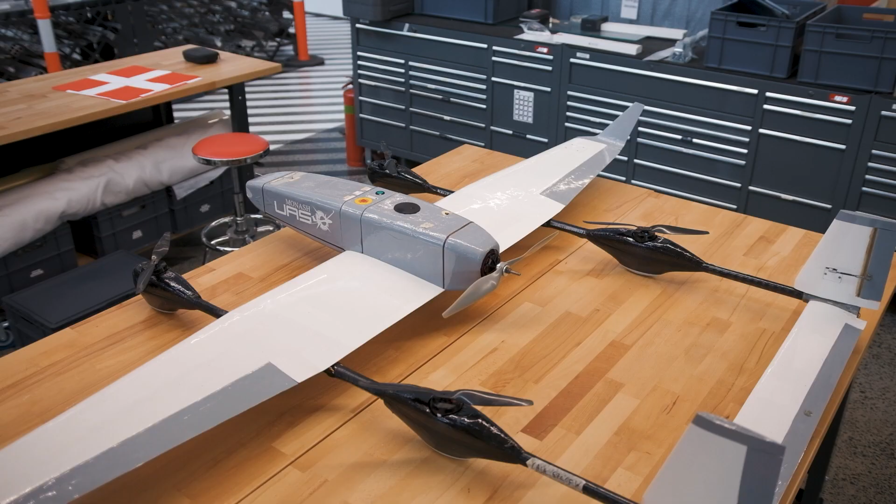This year's Medical Rescue Challenge required us to establish audio and video communication with people in regional areas while they wait for an ambulance to arrive. To combat this challenge, we designed and built two aircraft: one capable of vertical takeoff and landing, which was to deliver a rover, and one conventional aircraft that stays in the air and acts as a relay.

The competition this year was unfortunately cancelled. However, we realised that the relay aircraft we designed might be capable of breaking a current world record. Our aircraft was designed to maximise endurance, to maximise the time that the aircraft can stay in the air and transmit the feed to emergency services. In doing so, we designed an aircraft capable of flying longer than the current endurance record for under 5 kilo aircraft. The current record stands at 2 hours and 20 minutes, as set in November 2020.

To maximise our flight time, our team undertook a few projects to reduce weight and drag on the aircraft, undertook thrust testing to select the most efficient motor and battery combination, and ensured that we minimise electromagnetic interference. At this stage, we constructed a test bed that allows for pilot training and autopilot optimization.

Our next steps over an 8-week period, when we are allowed back on campus, will be to construct a model on which we can easily test and replace different motors, and a final version that will break the world record.

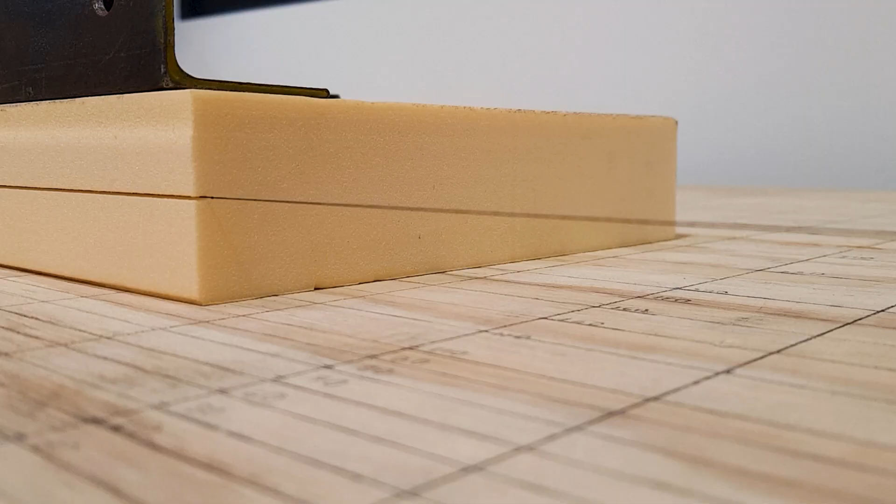So how did we make all this possible? We've been working on reducing the weight and drag of Local Hawk's wing. Our current wings are made by laying up fiberglass over a foam core cut in the shape of the wing we want to build. These wings are something like 7 to 10 times stronger than they need to be. In aerospace design, we want things to be as light as possible, which means we want them to be as weak as possible with some factor of safety applied.

I know that sounds bad, but any extra weight that goes towards increasing strength beyond what we need costs more energy to make it fly. The way we make our wings also creates a seam at the leading edge, which has to be sanded perfectly smooth, otherwise the aerodynamics over the rest of the wing are ruined from the start.

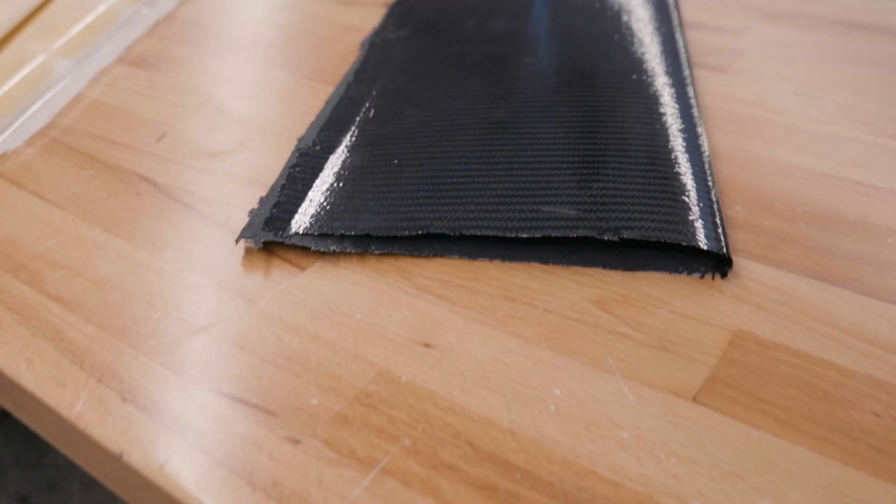We have devised a layup method that allows us to make the skin of the wing without the seam at the front and separate from the foam. This improved leading edge will have reduced drag, which means that the energy that was required to overcome this drag can now be used for longer flight times.

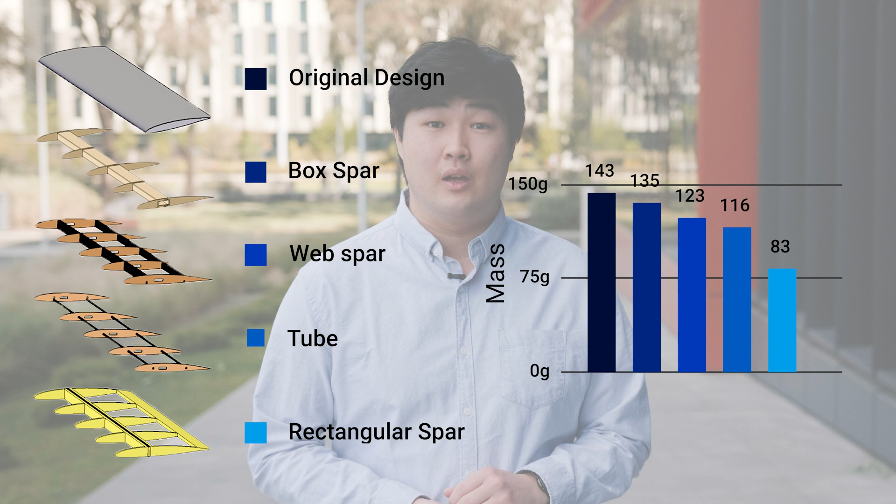Now that we can make the skin separately, we have a lot more flexibility about the internal structure design. Whilst extruded polystyrene is incredibly light, air is much lighter, so we have designed an internal structure that is mostly hollow. This new construction method would only be adopted if it brought more benefits than drawbacks. The main benefits of this new design are drag reduction, as mentioned before, and the potential for weight savings, with all 4 designs for internal structures showing a weight reduction. The rectangular spar design in particular has a weight saving of over 40%.

The design I have here has a weight saving of 20%, made of hollow tubes from carbon fibre as well as plywood spars.

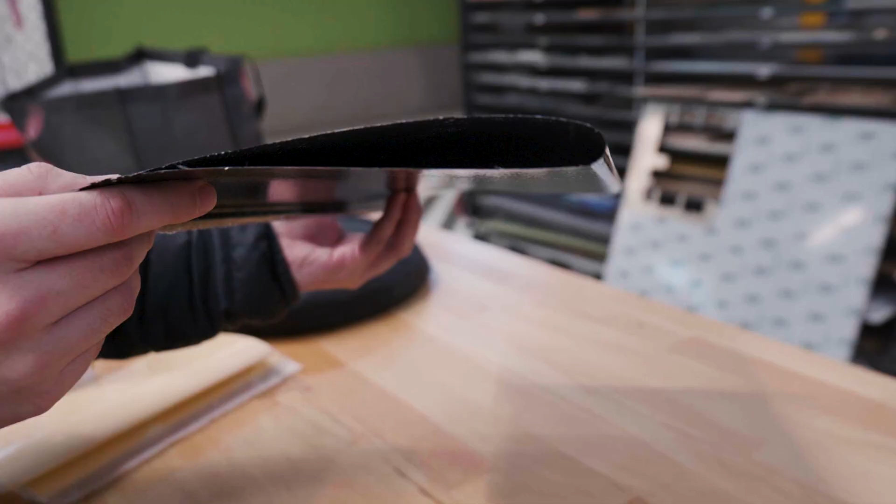During our test constructions, we found that the new method of construction is much simpler, since we only need to create the skin, then attach the internal structure at a later time.

In future we are looking to verify the strength of our designs experimentally. However, this has been delayed due to the lockdown.

With the new design, it also requires a redesign of our control surfaces, as well as the mounting surfaces for our servos. This is being done concurrently by another team. UAS's current control surface design features an exposed linkage and hinge slot.

Servos are connected to control surfaces by a linkage, generally a simple metal rod, running from the servo arm to a horn attached to the control surface.

Analysis on ANSYS CFD found that the straight test section of the wing created 15% extra drag at 0 degrees angle of attack. We aim to take that down to 0.

Our new internal control system fits inside the wing so that there's no interruption to the smooth surface of the wing. This is done by placing the servo deeper inside the wing, shortening the servo arm, and 3D printing the control surfaces separately from the original foam core of the wing.

The new 3D printed control surfaces are extended on the underside so that when the control surface moves up or down, the airflow remains attached, reducing the aircraft's drag.

The control surfaces can be printed out of carbon fiber filament or even a fiber reinforced nylon, which weigh little more than the existing skin and foam control surfaces.

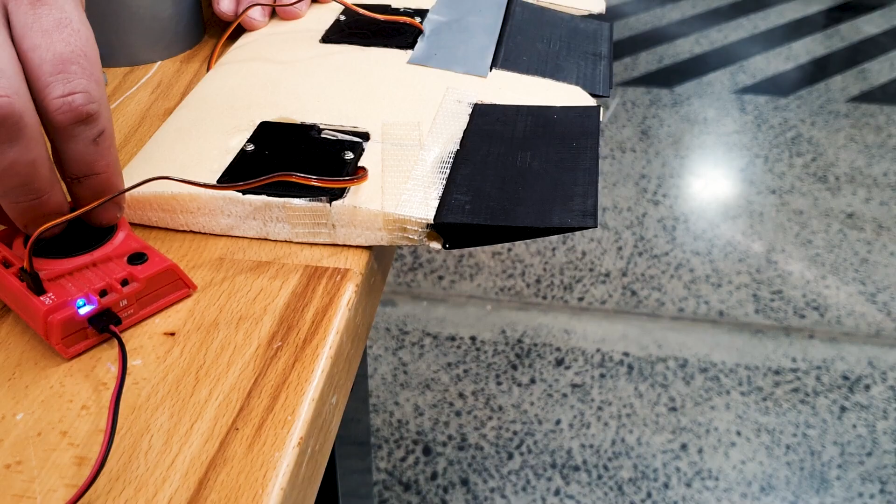The first prototype involved retrofitting an internal linkage mechanism to our current chord wing design and hinging 3D printed control surfaces. Notice how the mechanism is completely enclosed inside the wing, and the hinge slot remains covered for most control surface deflection angles.

We encountered issues around component access and ease of installation due to the small size of the parts involved, although the design does still fulfill the drag reduction requirements.

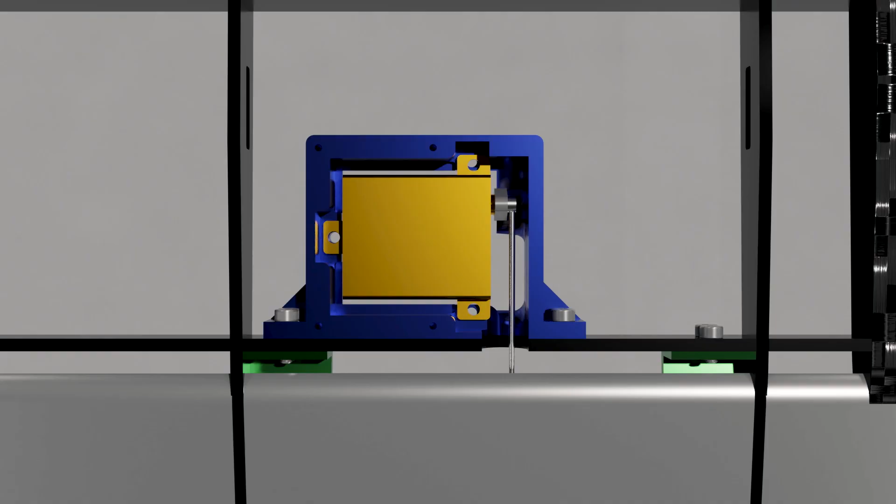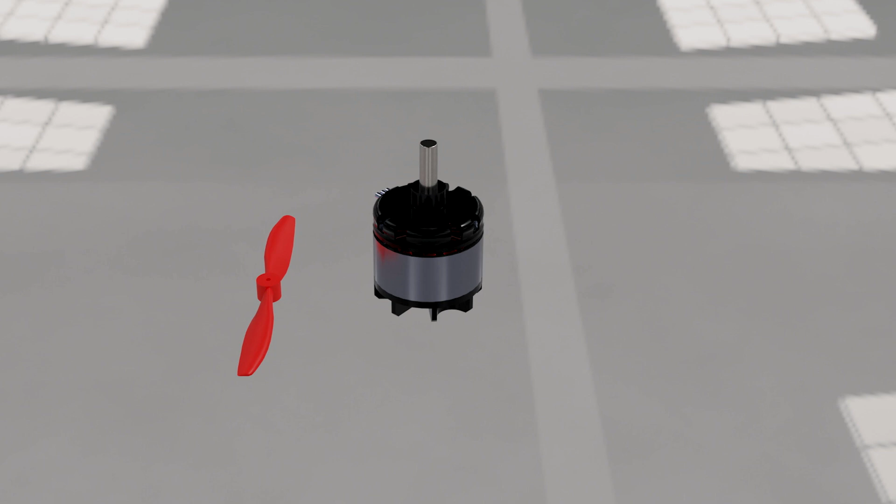Now we have a great airframe and construction method. What about the powertrain? The powertrain of an aeroplane generally consists of the propeller, the motor, the speed controller or ESC, and finally the battery.

Beginning with the motor and propeller, we had to find the ideal combination where the propeller was producing its thrust as efficiently as possible, and the motor then producing its power as efficiently as possible.

There are two variables to optimize here, being prop diameter and prop pitch. These are related together by the ratio pitch over diameter. We can optimize the best P over D and then choose the diameter to have the highest prop efficiency.

Now that we've chosen the propeller, we need a motor. There are literally thousands of motors to choose from, sourced from all over the world, so it's not a small feat. Furthermore, motor manufacturers all provide different specifications, such that motors are hardly comparable.

It's impossible to decide on a motor without a little guesswork, at least not without testing them ourselves. So we decided to test them ourselves.

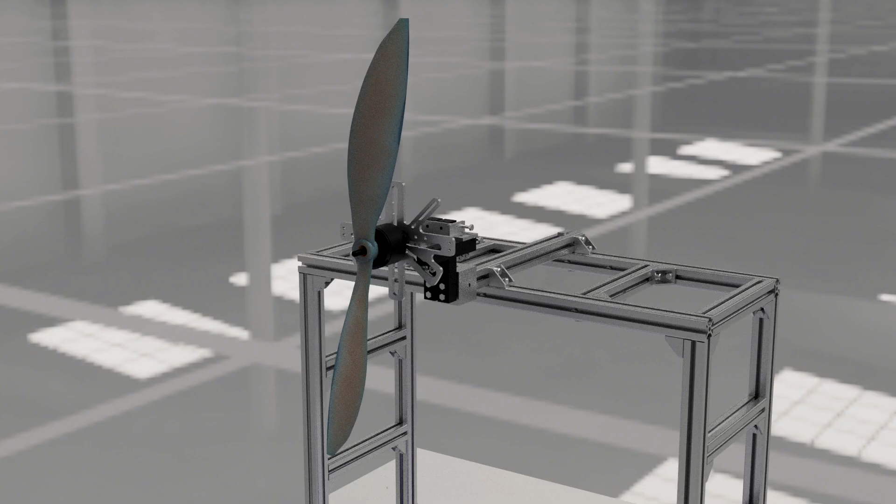The thrust test stand tests, monitors and records the effectiveness and efficiency of our UAV propulsion system. This stand records thrust, torque, RPM and electrical power at 2 stages of the cycle. It also has multiple sensors.

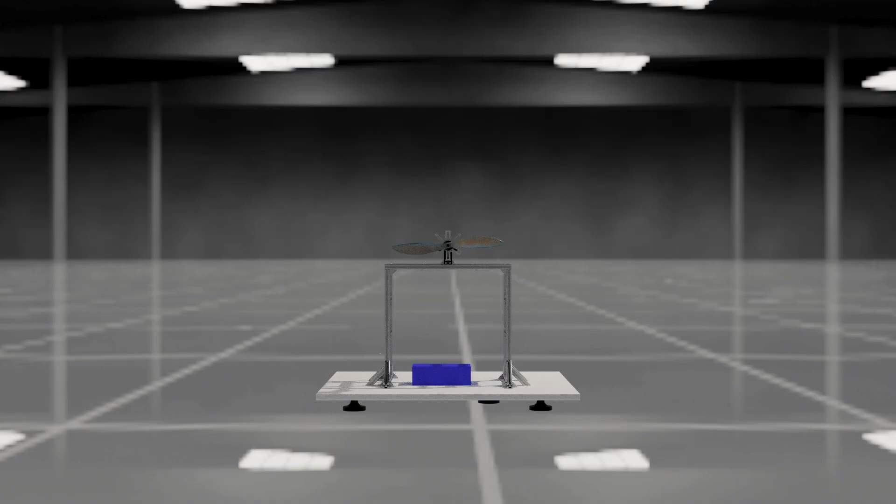All these sensors are integrated through a custom-built PCB that interfaces with Tora. With this data, the powertrain can be optimized for a given aircraft requirement. For example, the world record aircraft requires that we fly at the maximum lift-on drag.

We now have a reliable platform to accurately predict how our aircraft will perform and make the best decision possible about our UAV propulsion system.

With motors and props sorted, we can now turn our attention to the electronic speed controller. Traditionally, these work by turning on and off power to the motor really fast to adjust the power going in, kind of like a square wave. The inductance of the motor normally smooths this out and it's fine.

For this plane, however, we needed something better. We used something called field-oriented control, which basically provides a pure sine wave to our motors. Using this, we can increase efficiency by up to 10%, which is huge.

The last step of this process is to find a battery. In keeping with the theme of innovation with this project, we looked at custom lithium battery packs.

These have astonishingly high energy densities and are great for our use case of a relatively low power draw system. We were just about to pull the trigger on those batteries when our attention was drawn to a new cell type called semi-solid lithium technology.

These have the same energy density as lithium ion, but allow much higher current draws, allowing us to create hybrid battery packs suitable for even our most powerful aircraft, such as our airframe. With such high power draws from our mainframe though, it brings some unexpected issues.

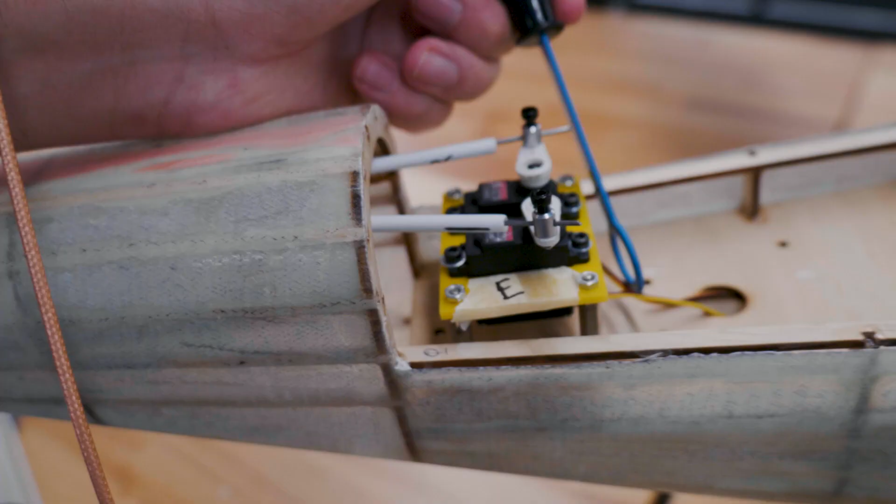Until now. We found uses for our EMI probes in no-contact PCB debugging. By using a really small tip, we can pinpoint exactly what circuit component is generating noise and couple into the circuit to see what's going on.

Using these probes, we revised our avionics stack to optimally shield from EMI. We completely rerouted all wiring for the Local Hawk, and we finely tuned our antennas to reduce power draw. That last point is especially important for the world record, where we need to reduce power draw as much as possible across our avionics stack.

Redesigning the wiring harnesses allows us to eliminate nearly all servo jitter that can waste valuable energy. With all this technology and development, this Local Hawk is our most advanced yet, and we can't wait to smash the world record.

Our project Girbal is named after the Bundjalung word for surrounding attack. We aim to create a swarm of autonomous drones that can locate and navigate themselves indoors, are safe to fly around humans, and can get to their goal destination without colliding with other drones. So how do we do it?

Our indoor positioning system utilises new technology, the same used in Apple AirTags, so that our drones can identify their precise location everywhere. We've also implemented our own collaborative pathfinding algorithm, so that drones will never crash into obstacles or each other. Our pathfinding algorithm uses positioning technology to allow our autonomous drones to find the most direct path towards their goal without any collisions.

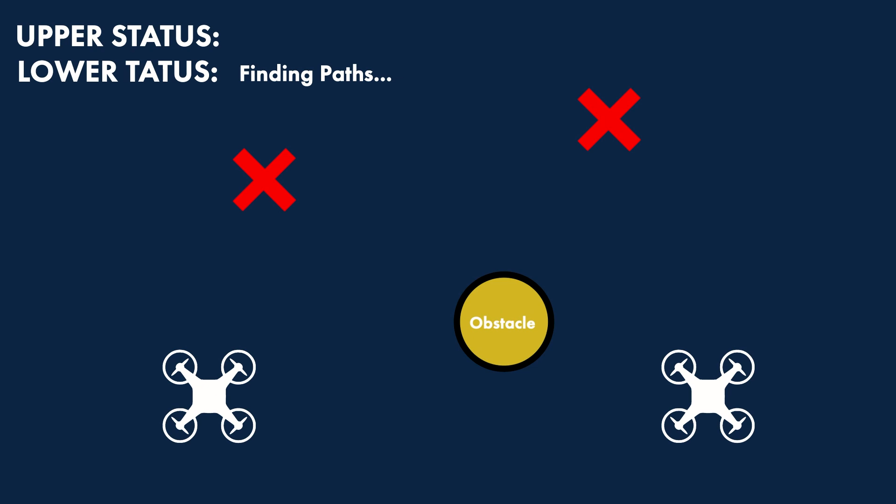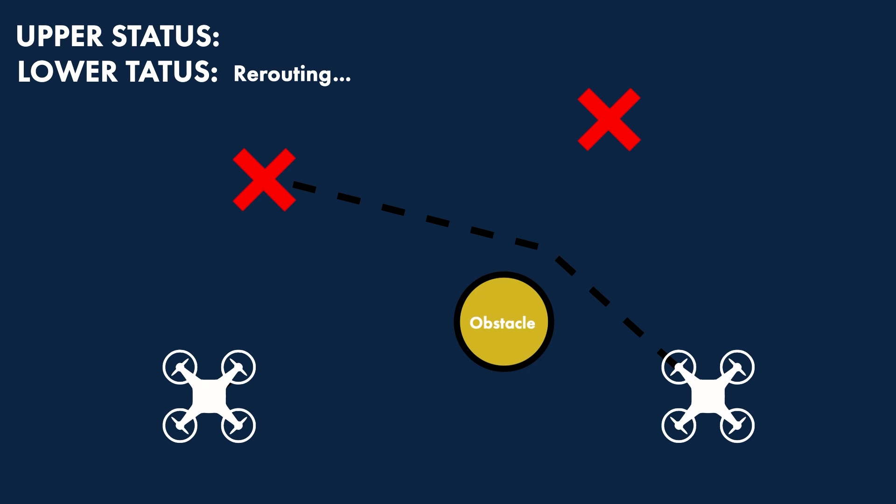To achieve this, it comprises 2 layers. On the lower layer, the algorithm searches for the most direct path for each drone individually, avoiding known obstacles on the map. As part of the upper layer, the algorithm searches for conflicts between the drones' paths. If a conflict is detected, the algorithm requests that certain drones replan their path before checking again to ensure no new collisions have been created.

Once it is sure that there will be no collisions between our drones, the paths are sent out to corresponding drones over our network. We have developed our own graphic interface for testing, enabling us to better understand how our algorithm is running and if there can be any improvements made. This allows us to keep working on our algorithm, continuously trying to improve its efficiency and efficacy.

GPS is an amazing tool to find the position of our drones in 3D space. It's a shame it doesn't work indoors. On the other hand, ultra-wideband technology is an increasingly popular choice in industry for indoor positioning and high-precision locating. We are using it to replace GPS indoors. UWB can be accurate to within 4 centimeters by measuring the distances between the drone and multiple stationary points.

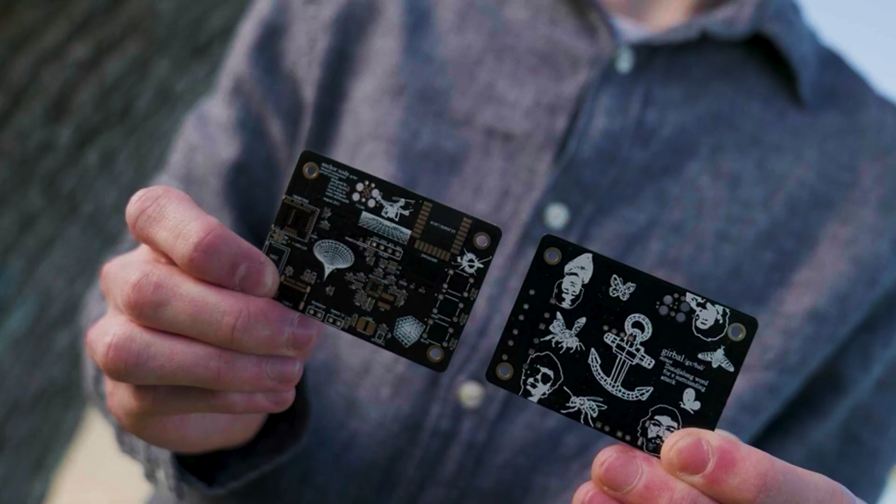So how do we make these stationary reference points? Well, we call these things anchor nodes, and communication between the drone and the mission controller takes place via these anchor nodes over a network type called thread. The benefit of implementing a network using thread is its ability to repair itself and dynamically respond to changes in the network, ensuring a high level of robustness and reliability.

The PCB for these nodes combines various components, including a module for UWB communication, a module for thread network communication, and a battery management system. Together, these components allow us to form a portable mesh network that has multiple anchor nodes communicating to each other, to multiple drones, and to a central mission controller that facilitates positioning, telemetry, and goal setting for navigation.

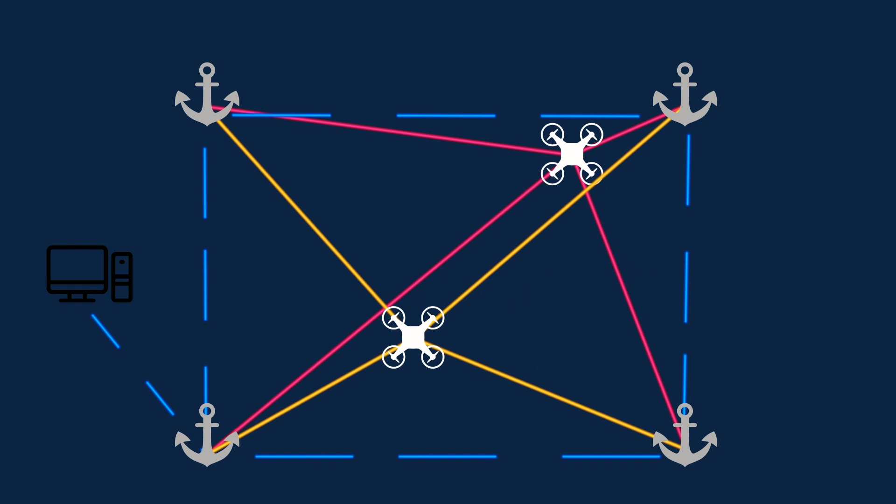So we can pick up an anchor node, place it around a drone, and it will automatically detect its position, join the network, and start helping out. The entire setup can be done in under 5 minutes without any configuration needed.

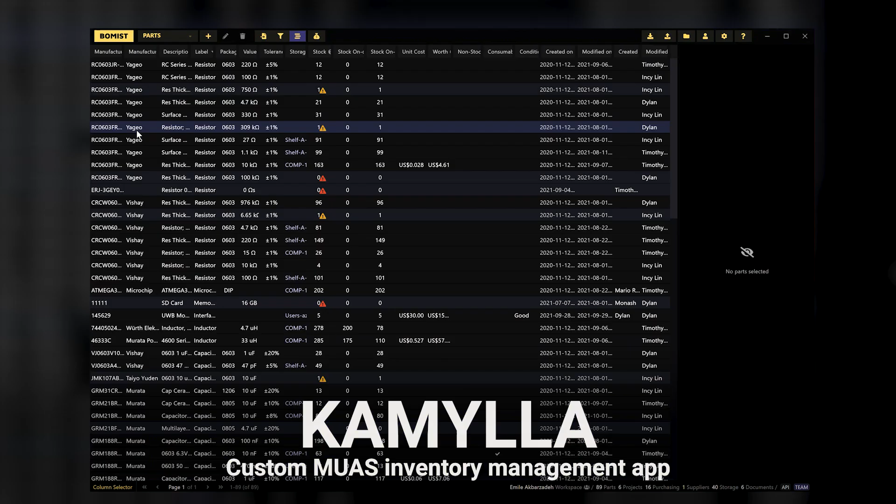Kamylla interfaces seamlessly with BOMIST and the inventory management program. Together, we aim to prevent items from being lost and flag items that need to be reordered to avoid delays in our projects. Kamylla is easy to use and a clean web app that works alongside BOMIST.

Using their own account, a UAS member can scan an item to take it out of inventory. Then later, you can simply scan the same part to return it, all from Kamylla. This allows us to conveniently take and return items from the compactors, JBS cabinets, or the workshop inventory, all without touching another computer. A common problem is needing to search stacks of drawers to laboriously find potentially 100 different PCB components.

With our new inventory management system backed by Kamylla, this is a problem of the past. BOMIST empowers UAS members to create a custom project, import their PCBs, bill of materials straight from Altium, then generate a custom purchase list of any components not stocked at UAS. This helps our projects deliver on time and on budget.

UAS members can select from a range of quotes automatically sourced by BOMIST. We can also manage our supply chain to create custom quotes and assign this to custom suppliers we've added. After ordering, this enables us to track a purchase from order to delivery, keeping everyone informed at all times. Once added to inventory, a UAS member can scan these items, scan a breadboard, and be on their way to work on one of these projects.

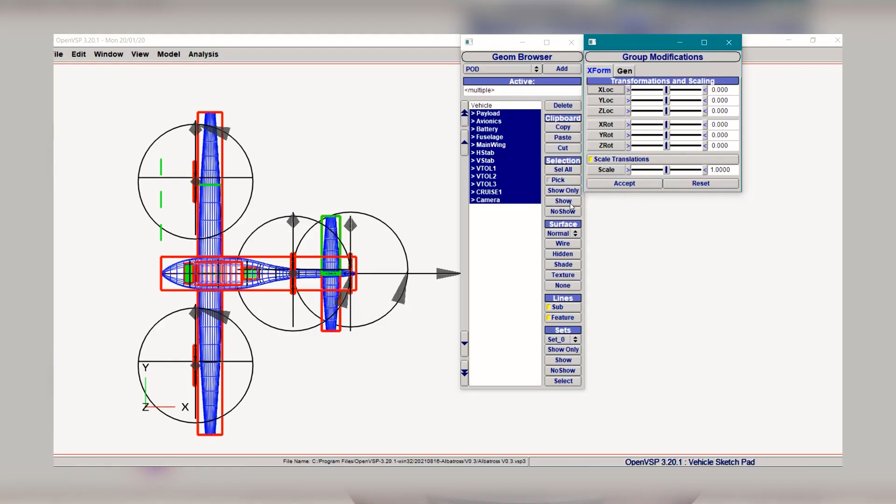Once we have the best of those designs, we can continue to iterate on it to increase its performance. We often use Open Vehicle Sketchpad, a tool originally developed by NASA, at all stages of our design, since we can quickly define and modify an aircraft as well as get estimates for drag and lift.

We also use XFLR5 for analysis. However, because it does not include the aircraft's body and drag calculations, we mainly use it for analysis of the aircraft's wings. A key factor in designing the best aircraft we can is knowing exactly what we are trying to optimize.

This may seem straightforward, but it becomes more difficult when we consider the many different factors involved in an aircraft's performance, and more difficult again when we consider the different ways we can measure best. For this competition, our biggest requirement can be broken up into vertical power draw, cruise power draw, and drag.

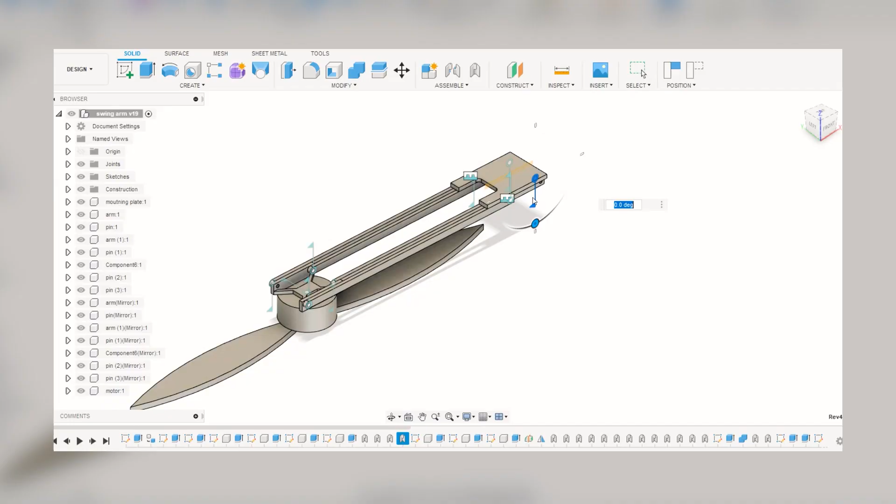Because two of these requirements are heavily dependent on the efficiency of our propulsion systems, this became one of our highest priorities, and we have gone through many different propulsion configurations in search of the best solution to our propulsion needs. Other areas that we have investigated have been lifting tails and retractable vertical motors. Of course, we also spend a lot of time looking for any reduction in mass that we can find.

Our aircraft has gone through several major redesigns over the past few months, a consequence of learning aircraft design as we go. But we have arrived at what we are happy to call version 1. In some ways, it's reminiscent of our current airframe, albeit considerably larger with its 3-meter wingspan.

It's a twin-boom quadplane with a high-mounted wing and a split tail section. This is the culmination of months of intricate back and forth design, and we are so proud to finally present to you the Albatross.

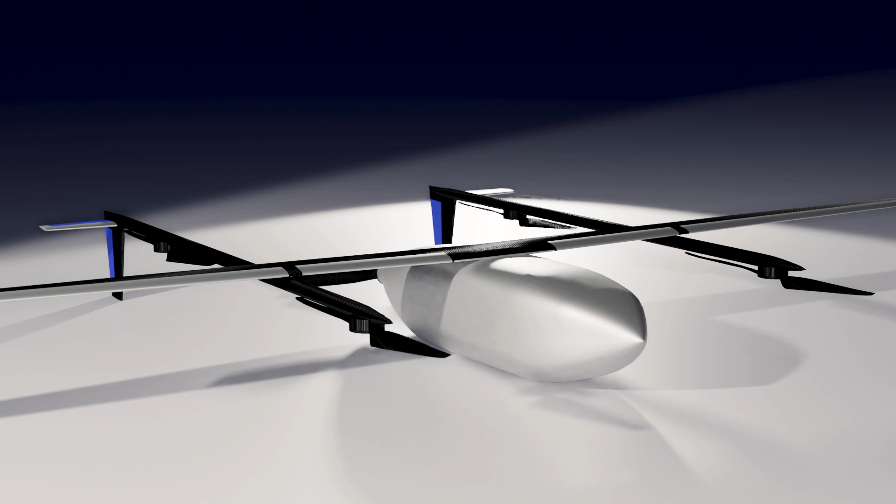With the conceptual design fleshed out, the next step is to design the details. These ideas now become projects. Our plan is to rapidly prototype a version 1 while optimising the design for version 2.

For version 1, some of our members in aerostructures will work on lightweight, high-strength wings. This wing is wider than anything we have built before and yet must be lighter. We hope to use the Icelandic method, but there are opportunities for carbon fibre 3D printing, generative design, new composite materials and much more.

Other members will work on the fuselage manufacturing and aerodynamics integration. Collaboration between the aerostructures, flight operations and avionics sections will allow us to reduce manufacturing time and improve access for operation. The fuselage structure itself will be designed from scratch with a goal to reduce mass by 30% compared to our other aircraft.

The propulsion system will be further developed. As mentioned earlier, the thrust test stand will be vital when choosing propellers and motors to maximise our efficiency. With avionics working on the camera and search system, flight controls and telemetry, the first version of our aircraft will be manufactured before the end of the year.

Other projects we hope to pursue include winglets, retractable or faired propulsion systems, weatherproofing, and packaging and portability for travel to Germany. In parallel, optimisation will begin. Mass optimisation will encourage us to look at alternative battery systems like lithium-ion, but mostly to build on the rapid prototyping phase in more strategic ways.

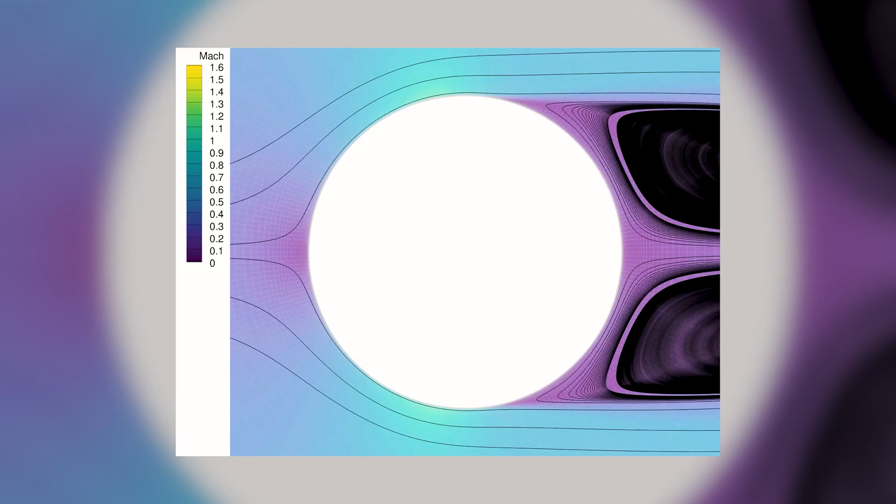Now though, we are planning to use mathematical techniques and algorithms with software such as MDOLab, MACH-Aero, ANSYS, XFLR5 and MATLAB to find the best solution, not just a better solution. We are hoping for drag reductions of up to 10%, and this could become a key component of our design process in future. In 2022, we aim to be testing the complete Albatross version 1 aircraft, while implementing our optimizations and improvements to build version 2.

Testing will include performance tests in VTOL and cruise, testing of the image recognition software, full mission practice, and much more. Additionally, we are working towards wind tunnel testing with Monash to further improve our design and validate our CFD.

More testing on version 2 will allow us to improve the design yet again for a final version 3, which we'll take to Germany.

The NFC competition is pushing Monash UAS to innovate and improve on what we've done in the past. The goal is to challenge ourselves with exciting projects beyond classroom learning and build a slick plane to compete in Germany. We hope this excites you as much as it does us.

Every year, our team continues to grow in numbers, skills, and diversity. Our members come from all walks of life, and together we strive for our team's goals. In line with this, we encourage anyone interested in our team to apply and see where your UAS journey can take you. We appreciate the hard work and effort put into UAS by all 70 of our members and look forward to the contributions that everyone will bring.

Monash UAS consists of members from many different backgrounds and specializations, ranging from civil to aerospace to electrical engineering, as well as commerce, arts, and design students. Together, we all bring our knowledge and unique viewpoints to the table. With this in mind, we encourage all students to apply and extend an especially warm invitation to women and other underrepresented groups in engineering.